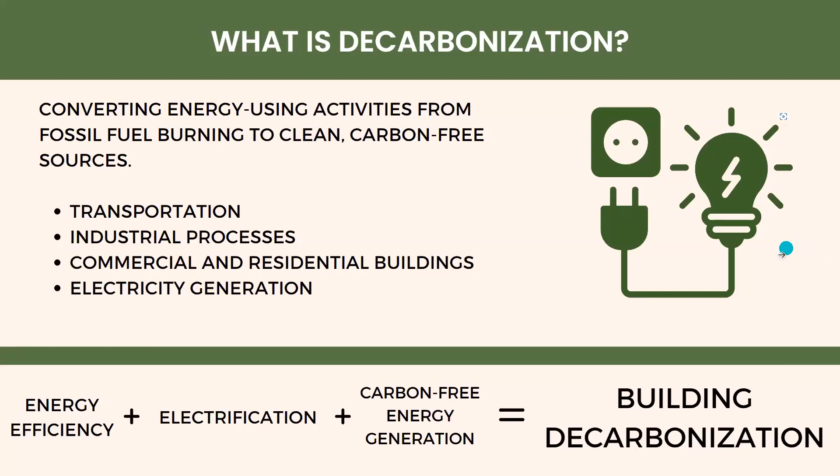So the easiest way that I found to explain those three aspects of building decarb to folks is sort of repurposing the three R's, right? I think a lot of us grew up with reduce, reuse, recycle when we were talking about materials waste. So the new three R's for building decarbonization are reduce, replace, renewables.

So reduce, that's that energy efficiency piece, right? We're talking about limiting the amount of energy that the building even needs to perform its duties to keep us safe and comfortable. So that's limiting the amount of heating and cooling that even needs to be provided to the building, or the amount of energy that those pieces of equipment need to perform their work.

And second R, replace, that's that electrification piece. And that's replacing the appliances and pieces of equipment in buildings that are currently utilizing fossil fuels in many cases, burning them right at the building site, and replacing them with a version of that equipment that can run on electricity. So we're primarily talking about things like stoves, water heaters, furnaces, or boilers.

And then that last R, renewables, that's that carbon-free energy generation piece. That's saying, on top of reducing the amount of energy the building needs in the first place, and making sure that everything in the building that needs energy can utilize electricity, that the electricity being delivered to the building is coming from some sort of clean, carbon-free source, whether that be derived at the building site or from somewhere else. It's not utilizing fossil fuel burning at any point in that chain.

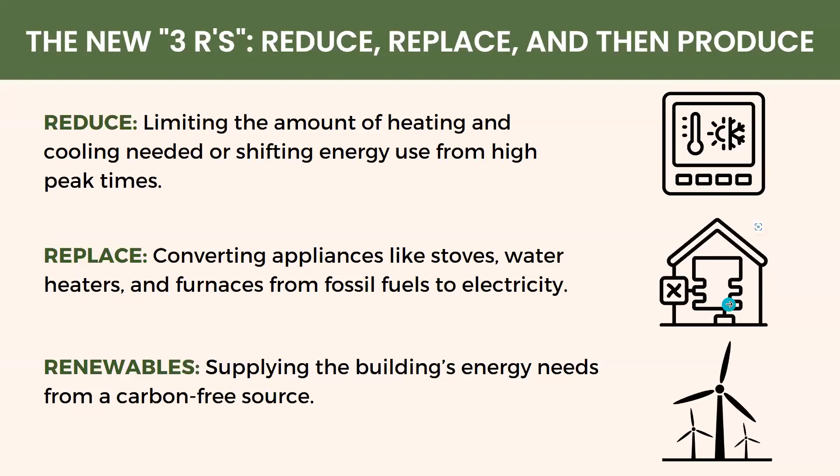So we can dig a little bit deeper into what all of those aspects even mean, or what are some of the specific tools or tactics that we're using to accomplish those three pieces. So let's look at that energy efficiency or reduce piece first. What we're primarily advocating for to happen in buildings are upgrades to the building envelope. So things like building weatherization, sealing those air gaps and things like that, utilizing higher performance insulation and windows in new construction, or swapping out older, less well insulated versions of that in existing building retrofits. And that's really the key piece in minimizing the amount of heating and cooling that the building needs in the first place.

Energy efficiency also would entail utilizing higher efficiency heating and cooling equipment, right? So utilizing an appliance that can provide the same amount of heat or cooling to the building with less energy as the technology improves. It can mean utilizing heat recovery technology that, when we're ventilating our buildings and bringing in fresh outside air, we're recycling some of that conditioned heat or cooling that we already have in the building and applying it to the new fresh air coming in, so it doesn't all have to come from the heating and cooling system. We're not wasting as much of the energy that we've already used.

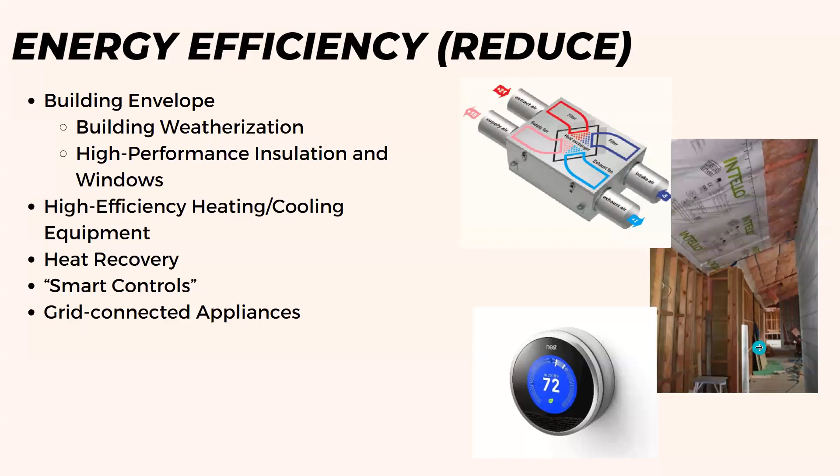And second, let's dig into what we mean on that second R, that replace phase or electrification. And really this hinges on a few main areas where we want to move on from older forms of technology that serve our buildings and move into these new electrified ones. So the key technology here is heat pumps, and we'll talk a little bit more about what they are in a little bit.

But swapping out for space heating and cooling our furnaces, our cooling only air conditioning units, our gas boilers, and replacing them with some form of heat pump to provide that heating and cooling to the building instead in an electrified and efficient way. We're also talking about utilizing heat pumps for water heaters instead of having a burner that heats up the water in a tank, utilizing a heat pump to heat up that water instead.

Another key aspect of this replace or electrification piece has to do with cooking equipment. Many homes and commercial kitchens obviously are utilizing a gas range stovetop or a gas oven. We want to start replacing those pieces of cooking equipment with things like induction stoves that utilize magnets, electromagnets, to heat up your pan or pot that you're cooking in instead of having a burner underneath it. And so it can provide the same level of control over your cooking in a more efficient way, moving to other electric cooking equipment as well. We'll talk a little bit about why that's a key component here as well.

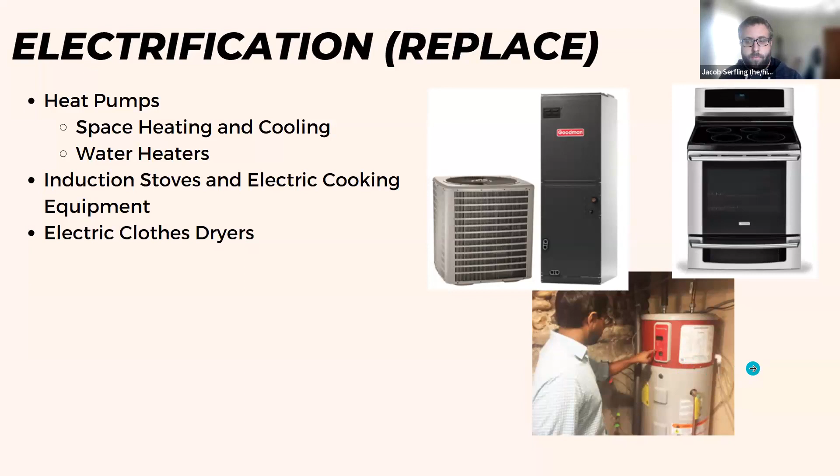I mentioned before that we maybe want to dig a little bit more into what a heat pump is, since that's kind of the crux of that electrification piece, and making sure that folks understand what that means. So a heat pump is a technology that we use to move energy that already exists somewhere else, or move heat that already exists somewhere else and put it where we want it to go, as opposed to burning a fuel or running an electric coil to create new heat.

So the easiest way to kind of think about what they are and how they work is to think of an air conditioner or a refrigerator that can run in reverse, right? So what is your air conditioner doing? It's forcing heat in your home to move outside, even when the outside of your home is warmer than what your house is, and you're utilizing electricity to do that. So a heat pump does that in reverse, right? It's taking the heat that exists in the outside air, even on a cold winter day, and it's moving that inside the house. And because you're moving heat and not creating it, you can provide the same level of comfort and maintain the same temperatures inside the home while utilizing much less energy.

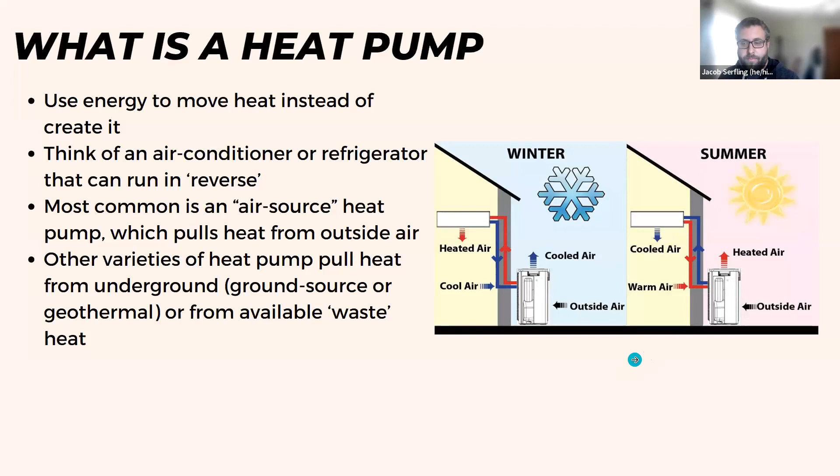And then finally, that last R, that renewables or that carbon-free energy piece, what can that possibly entail on a building by building basis? So that might be clean electricity that's generated at the building site, such as a rooftop solar system.

That might mean ensuring that electricity that you're purchasing from a utility or somewhere else is coming from a clean source. So, utility scale solar or wind projects, or making sure that the building is supplied by some sort of community solar system. It doesn't necessarily have to all be at the building site in all cases.

That can mean utilizing battery technology to bank clean electricity from solar or wind when it's more available, and utilizing that stored electrical energy to provide energy to the building, even when those renewable sources aren't as active. And it can also mean delivering non-electric forms of clean energy to the building.

A really exciting concept that we've seen in different parts of the country is this idea of a thermal energy network. So these are cases where individual buildings have their own heat pump, but a joint networked system of wells is what's providing that heat that those heat pumps are deriving from. So it doesn't necessarily have to be electricity that's being delivered to the building, as long as that energy that's being delivered doesn't involve the burning of fossil fuels.

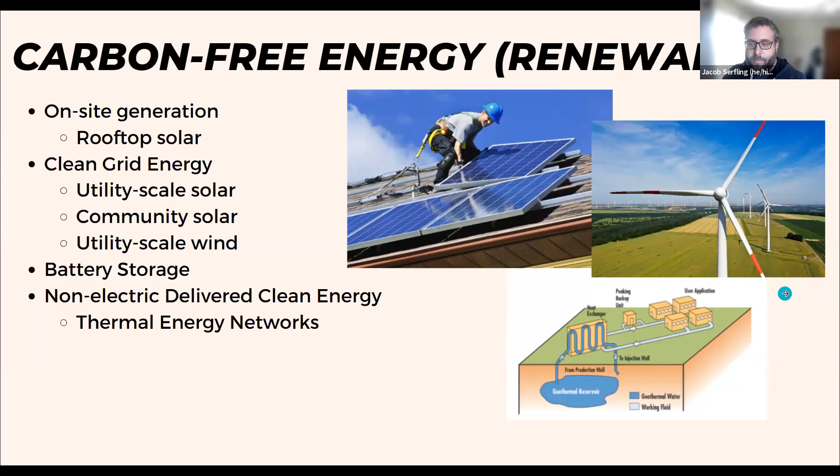Okay, I'm going to quickly take a sip of water, and then we'll get into why we've formed a whole coalition around this question of building decarbonization.

So why buildings? Of all the climate and environmental justice issues and sources of emissions and pollution that we could talk about, why the specific focus on buildings? So nationally, if you look at the data from the Department of Energy, we know that in any given year, typically commercial and residential buildings together account for around 30 to 40% of US CO2 emissions. So they're a really critical thing in general.

And we know that that share of emissions goes up as you move into colder climates in more densely populated areas, which is certainly a large portion of the Midwest. And then specifically in the Midwest, if we look at what buildings use energy for and where they're deriving that energy from, it becomes really critical to meeting our climate goals in this region.

So every 4 years, the Department of Energy does this survey called the Residential Energy Consumption Survey, or the RECS, where they collect a slew of data on how residential buildings are using energy. And so one of the things that they look at is the breakdown of end uses in buildings. And if you look at the Midwest, what you find is that

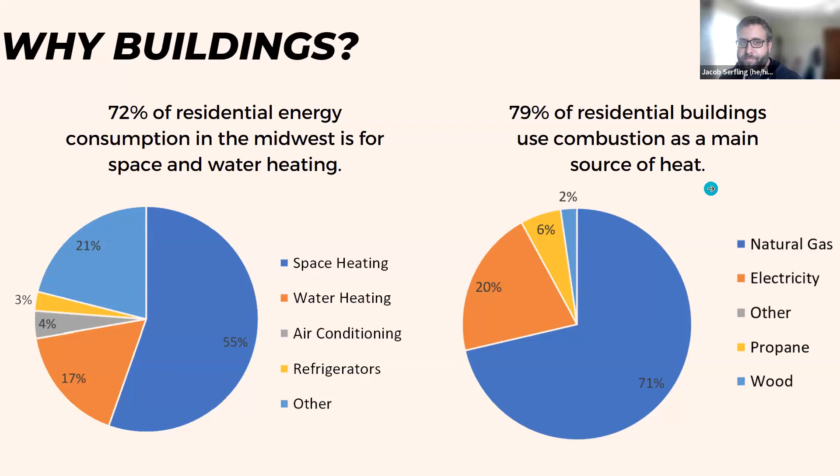So beyond that just huge share of emissions and pollution that needs to be addressed, there's also a sense of urgency to addressing these ignored aspects of building decarbonization because of how long buildings last and how long the stuff that we use to make them usable lasts.

So the American Institute of Architects estimates that around 80% of the buildings that we're going to have in 2050, which we know is kind of the end mark of when we need to be hitting net zero emissions to stave off the worst effects of climate change, they believe that 80% of those buildings are already standing or currently being built, right? So we know that we have to deal with our building stock here because it's either going to work for or against our climate goals.

We also need to recognize that equipment in these buildings, while maybe being replaced over that longer lifespan of the building as a whole, also lasts a long time. So the median lifespan of a gas furnace or other piece of fossil fuel heating equipment for a building is just under 20 years. So we know that there's a good chance that any furnace or gas boiler that's getting installed in a building today is still going to be in operation once we hit 2050.

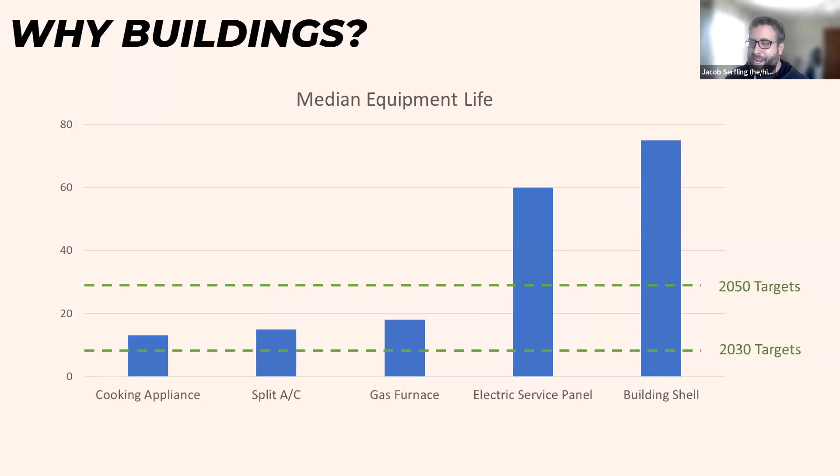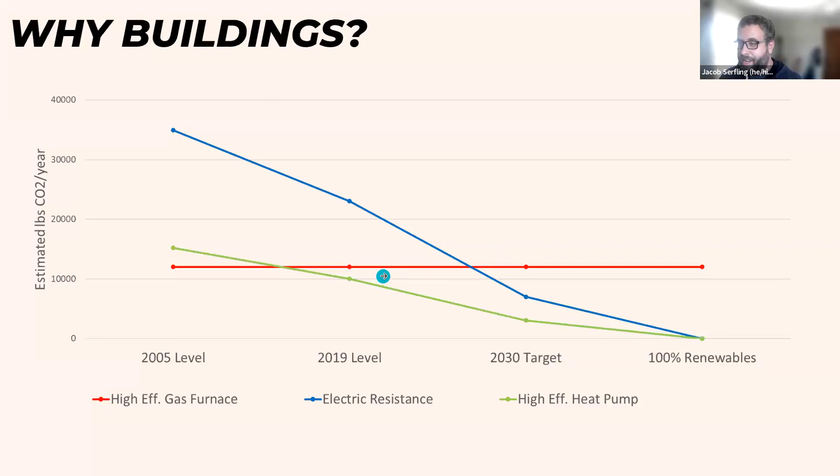Beyond the climate, emissions and pollution aspect, there are also a whole host of other reasons why building decarbonization is important and why we feel we need to deliver this transition equitably to all communities. Not minor amongst those is the health co-benefits of building electrification and decarbonization. So we know, and it's a statistic that's been confirmed multiple times by different studies, that we spend around 90% of our time indoors. And that percentage probably creeps up when you're talking about more disadvantaged communities, folks with disabilities and things like that. So because we're spending so much of our time indoors, we know that the quality of our indoor air has a huge impact on our health.

And we know that homes that are served by gas appliances, specifically gas cooking appliances being the main big one, because those combustion fumes are not as vented to the outside, have 50% to 4 times the concentration of indoor air pollutants, such as NO2, and that children in those homes are significantly more likely to develop asthma symptoms. And there's a whole host of other research coming out about other health detriments associated with having high levels of these pollutants in our homes.

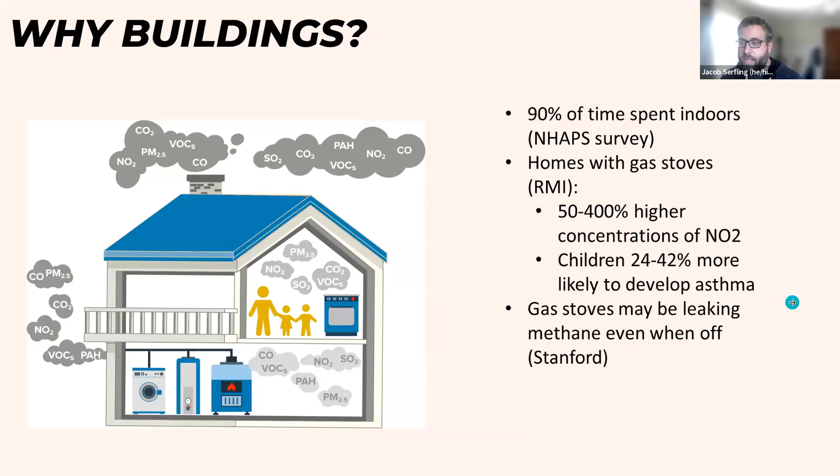And in fact, we know it's not even just when they're on. The nature of how these appliances get installed, we're learning more all the time that they're probably leaking things like methane into our homes all the time, just by the nature of having those open appliances. So again, there's the critical climate and emissions issue, but there's also a critical health issue happening here as well that should be addressed by delivering decarbonization to our homes and workplaces in this region.

And then finally, the energy burden and economic impact. And so right now, probably one of the barriers to building decarbonization being popularized across the region is that we've had historically pretty low natural gas prices and utility rates in this region for a long time, right? Especially compared to what it would cost to heat your home with an electric system, with the way that residential electric rates are currently being structured. And we're always sensitive to that as a coalition as well. We don't want to increase energy burden or negative economic impacts for at-risk communities as part of this transition.

But we also feel strongly that that's changing, and changing very fast, right? So in 2022, the Department of Energy was anticipating that residential heating prices were going to go up around 27% on average nationally for gas customers, and only 4% for predominantly all electric customers. And I know from digging into it for other conversations we've had on a state-by-state basis that in some of the states we work in, it was much higher than that projected 27% that those yearly average rates went up.

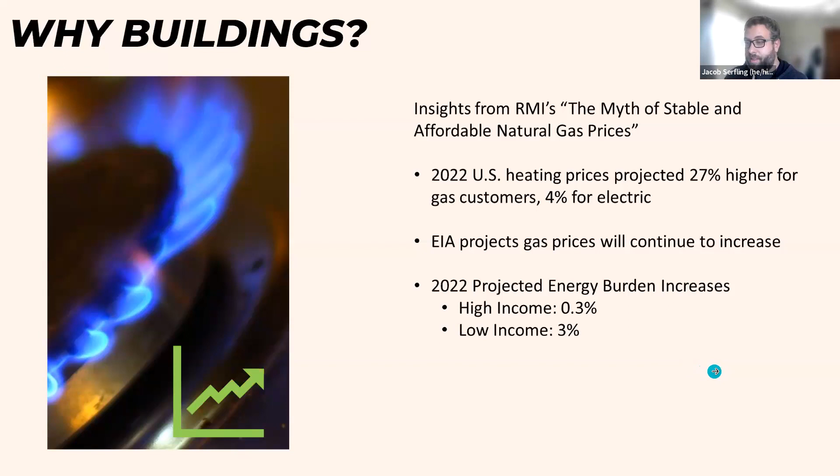So that's kind of why buildings in general, and all of the reasons for building decarbonization. And I mentioned before that this is really a critical Midwest issue as well. Part of that is just that the share of emissions that the Midwest provides the US is very high. We account for a little over a quarter of the nation's overall CO2 emissions. If we were our own country, we would be number 5 in the world, right between Russia and Japan.

And if we look at building specific emissions, like I said, we have this higher occurrence of homes being served by natural gas than the rest of the country. Remember, we said around 80% of homes have fossil fuel combustion as their main fuel source for heating. It's closer to 72% nationally for heating, and for water heaters, it's around 50% nationally. So just way more dependent on fossil fuel for our building heating compared to the rest of the country.

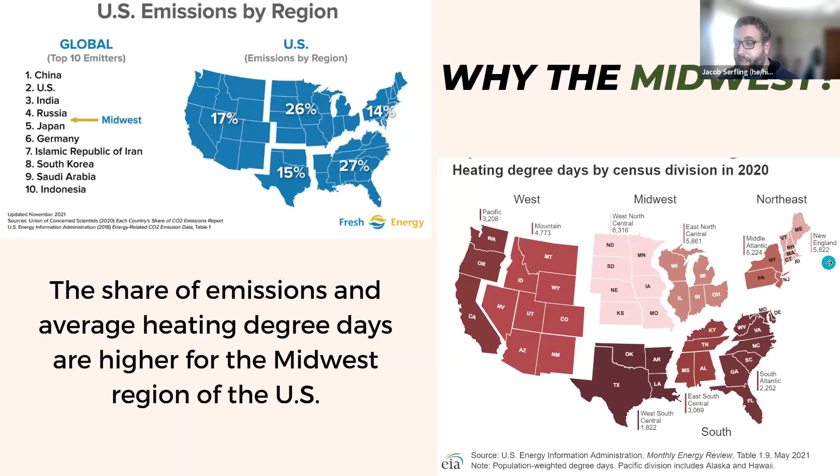So really, decarbonizing our buildings is super critical for the Midwest in a way that maybe isn't the number 1 item in other parts of the country. It is here. I'm going to pause there for a sec.

I also want to talk about this idea of making this an equitable building decarbonization transition. We really believe that strongly here at the coalition. So the definition that our members arrived at for what equitable building decarbonization means is to remove the hazard of fossil fuel usage in buildings and facilitate access to carbon-free heating, water heating, and cooking, while prioritizing Black, Indigenous, people of color, or other intersectional identities, and empowering poor, low, and moderate income households and underserved communities with clean technologies and infrastructure, including equitable outcomes in who produces and who benefits from decarbonization, and leadership of enterprises and communities most impacted by the burdens of energy and environmental injustices.

So getting into recognizing that idea that we're starting from a level of inequity in this work. And I always say this is not an exhaustive list of the statistics that pertain to the work that we're doing, but just to give folks a taste of the equity hole that we're trying to dig ourselves out of before we even talk about building decarbonization.

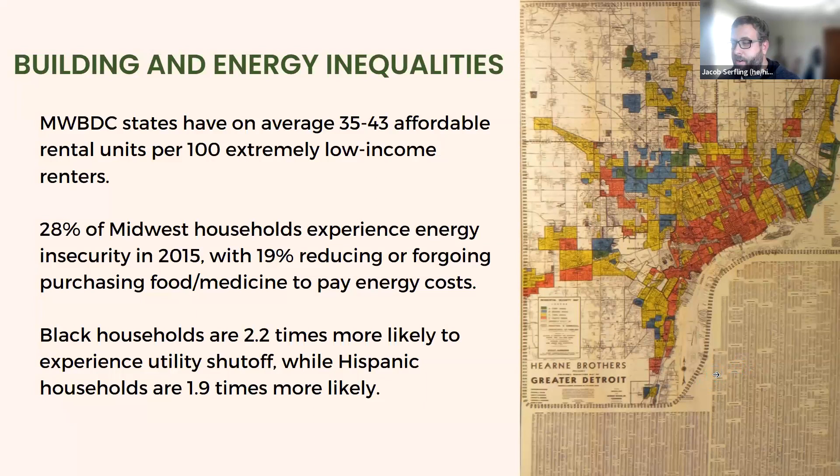So recognizing some of that reality, we know that historically, when we have been making huge investments and transitions of the nature that we will need to achieve building decarbonization, the reality has been that select groups have reaped most of the benefits from that transition, while other communities were actively sacrificed to do that.

Think about the electrification of a huge part of this region in the 30s, of even getting electricity in the first place. And where does the electricity get delivered? White communities. Where do the fossil fuel power plants and their pollution to provide that electricity get located? Black communities. So we know that this transition cannot be like that. These investments cannot be made like that.

And we can't even settle for equality of the benefits and downsides of this transition, because we're digging out of these historical holes. And we need to make sure that all communities are actually getting the level of support that they need to overcome these barriers to a clean energy transition, or just removing those systemic barriers entirely.

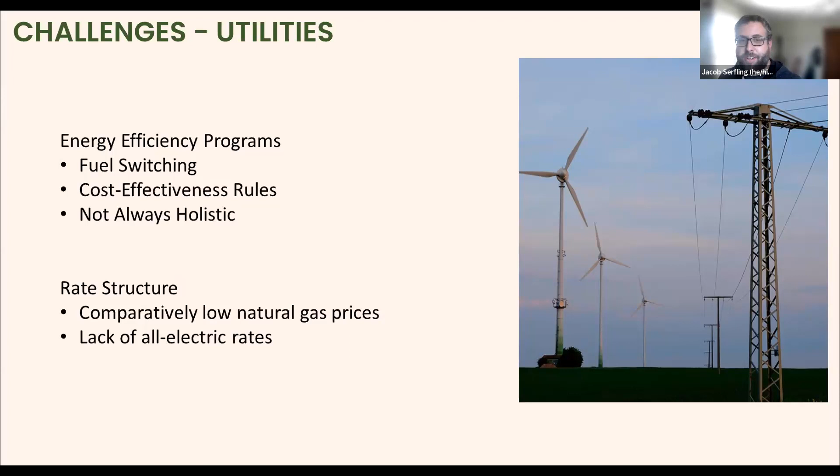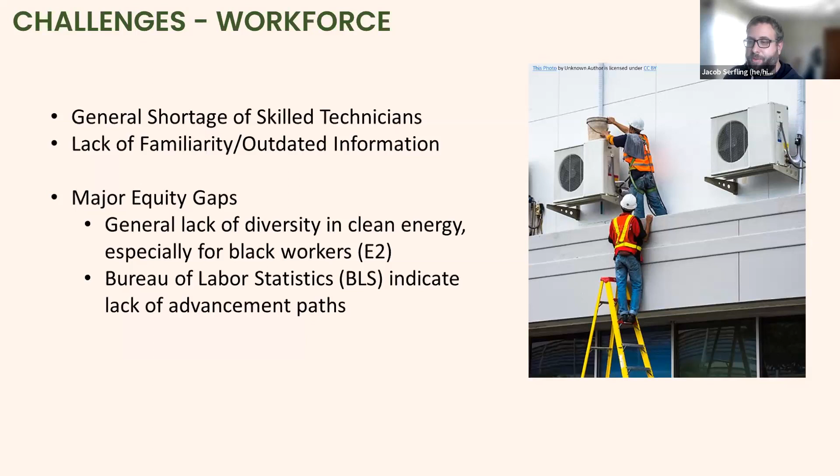And then just a whole host of other challenges that we know about and that we're trying to overcome as a coalition to help this region make this transition at the speed that we know we need to.

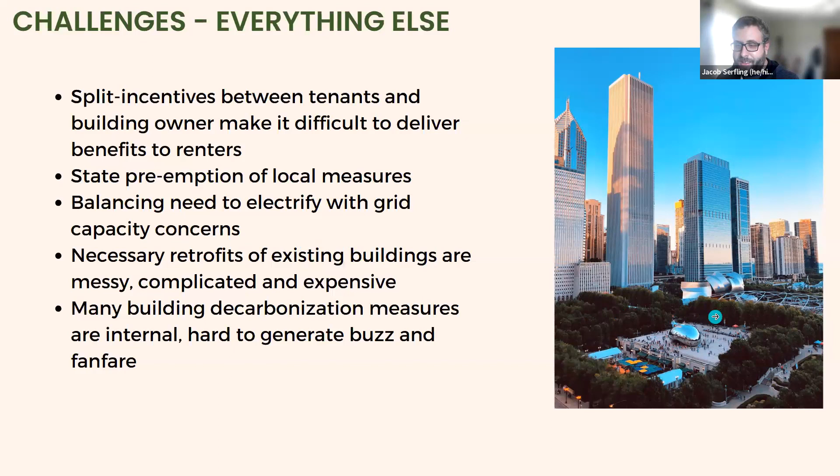So again, thanks for attending this training. This is really meant to be a high-level overview. We could get into all of these topics much more deeply given more time.